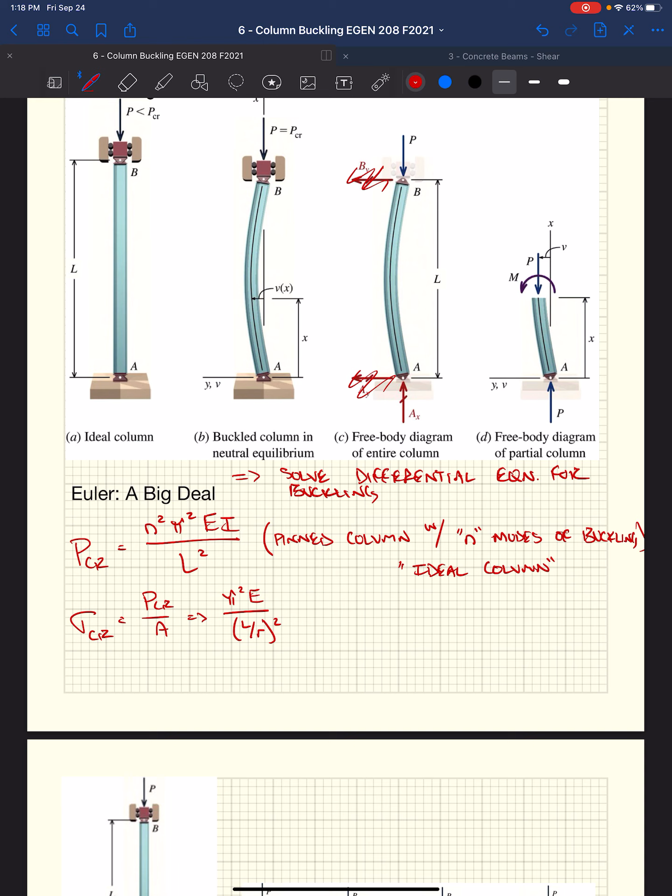Now we get onto the stuff that you guys are paying for, which is learning about columns, okay, whether or not you want to pay for it.

So we started talking about columns on Wednesday, right? These long, slender members that are induced with a compressive load, okay? We talked about Euler, Leonhard Euler I think is his name, who was super bored and decided to solve the differential equation for buckling and figure out what is the critical load, based on material properties, right, modulus of elasticity E, the moment of inertia, so that is the stiffness or resistance of a cross section to accelerate rotationally.

Okay, you guys got some of that in statics, I believe. And then the length of that column between its fixity points, you can figure out what is the load at which it buckles, like you would a ruler between your hands. And then if we just substitute in the fact that stress is force over an area, we can figure out this critical stress that is induced in this member when it buckles. Based on that, the equation simplifies to pi squared E over L over R squared, R being the radius of gyration, which we'll talk about.

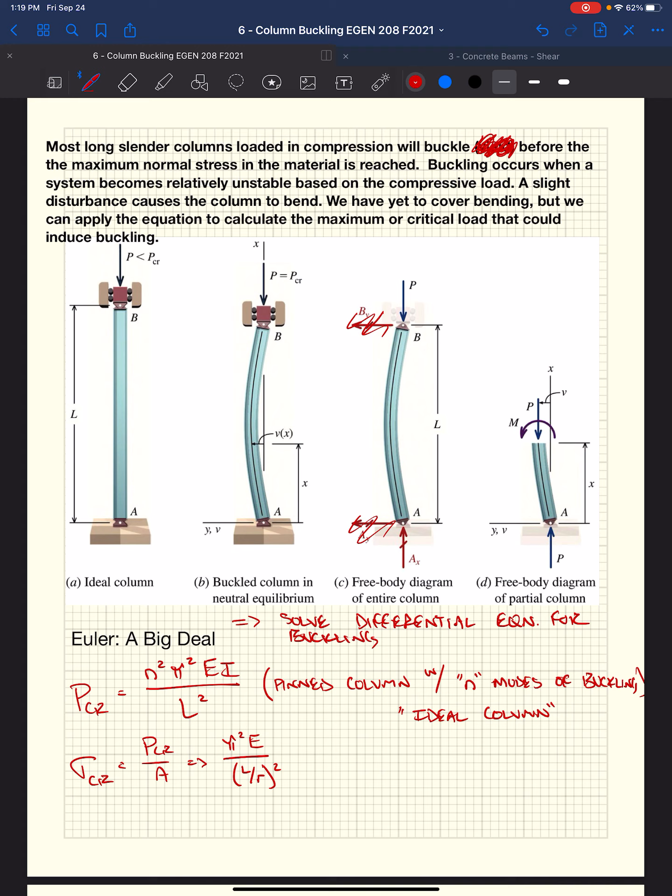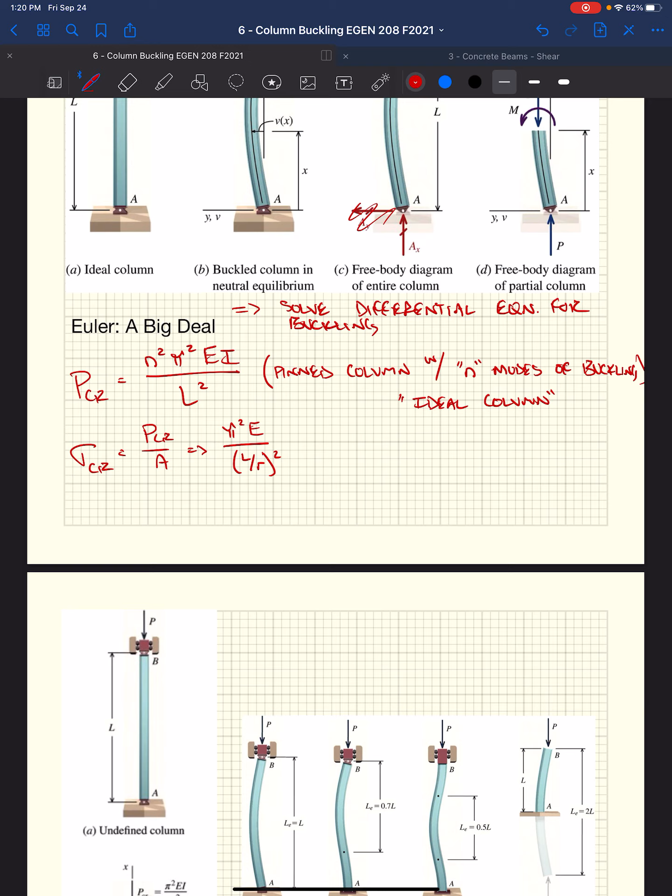And this solution is for a pinned column like we see here, with n modes of buckling, as I mentioned. As you can see here, we have our first mode of buckling, which would be one buckled shape. Then you have the second mode, which is a potential, right? And as you can see from the solution, it has n squared in the numerator. As our number of modes goes up, that critical buckling load goes up as well.

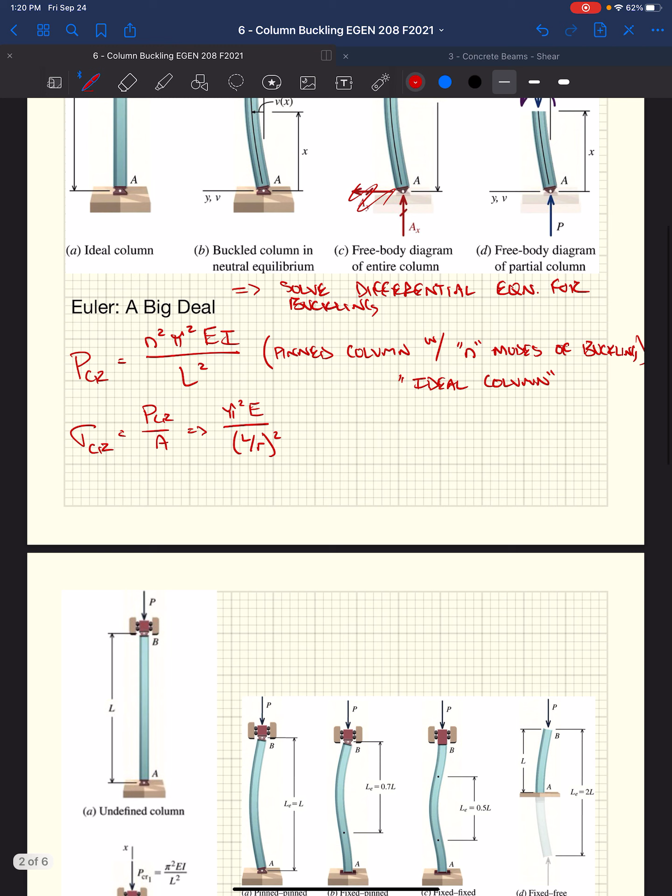All right, so some things to think about. If we graphed L, or L over R, and P critical, or our critical stress, right? So L or L over R is essentially the brace length — how long is our column? And then we figured out, we plotted different points for a given cross section, with a given modulus of elasticity and a given moment of inertia. We would get a curve that looks something like this.

Okay, essentially we exponentially increase our ability to carry axial load as we decrease the length, right? You can think of that like this big piece of rebar — me squishing on it right here in front of you, it's going to be able to carry a lot of load. But as we continue to make this rebar longer and we still put axial load in it, as we get longer and longer, that load drops off quicker, really fast right at first, and then it starts tapering off, okay?

So if we looked at some of this behavior, we could say our P critical, or our critical stress, is inversely related to length. So the longer the column is, the lower our ability to carry load. I think that makes sense.

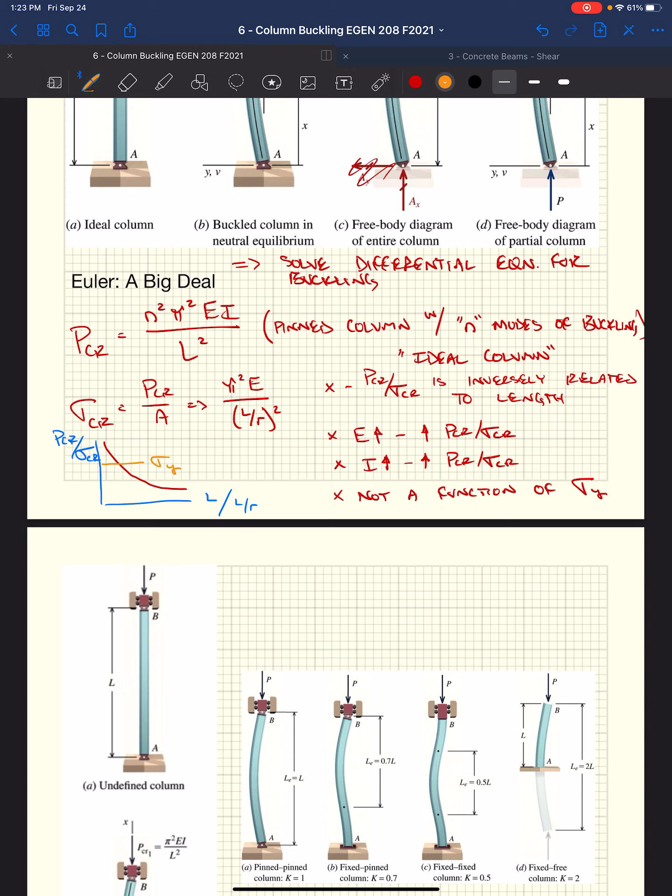Nowhere in this equation do we see the yield stress, right, or the strength of our material. So it's not a function of the strength of our material, but it is a function of our stiffness, okay, our modulus of elasticity. And as you can see in this graph, as we get lower and lower, we'll eventually get to a point where it actually won't buckle, but we will truncate it at our material strength, right? So at some point, we're going to have more strength because it's not going to buckle, but in reality we're going to yield. We're going to hit some sort of material plateau in our column.

Well, not all columns are pin-pin, okay? That's a pretty ideal column, right? Sometimes we can have a fixed pin column, right? Maybe you decide to embed a wide flange, right? This would be a wide flange section, an I-beam, okay? Maybe you embed this into the ground.

The lateral system at Langford, I think it's Langford, there's like a little dining common area as you first walk into that dorm area, okay? That whole building is carried laterally by big wide flange sections that are buried in concrete piers in the ground. They're just cantilevered out of there, okay? So the loads that are induced on those columns would follow this kind of fixed pin methodology, right? It's fixed at the base, it's not allowed to rotate, okay, or translate.

And then at the top where we have all of our roof framing in, it'd be more like a pin, okay? And then in some cases we might have a fixed column. It might have enough rotational restraint at the top where it doesn't want to let the column rotate. And then finally we have a fixed free column. So that would be one where it's allowed to translate and rotate at the top. Essentially a cantilever, okay?

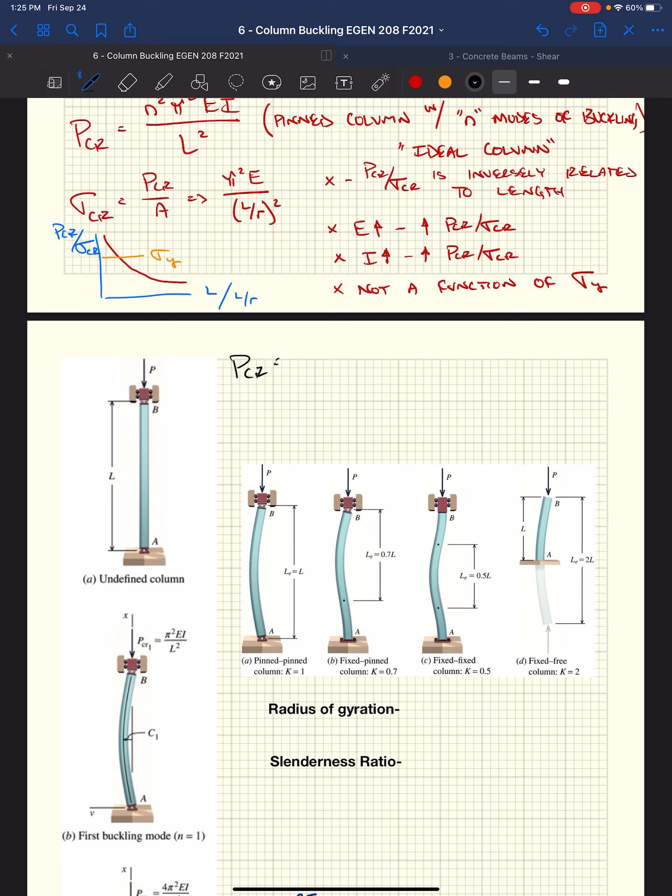So we got a new solution for this, right? This P critical that we had before, this is for our idealized column. Well, Euler went back through and calculated what the capacity is based on these different fixities, and he developed this equation. So now our critical force, or our critical load, P, okay, is pi squared EI over this term KL squared. Well, this KL is what we call L sub E, or our effective length.

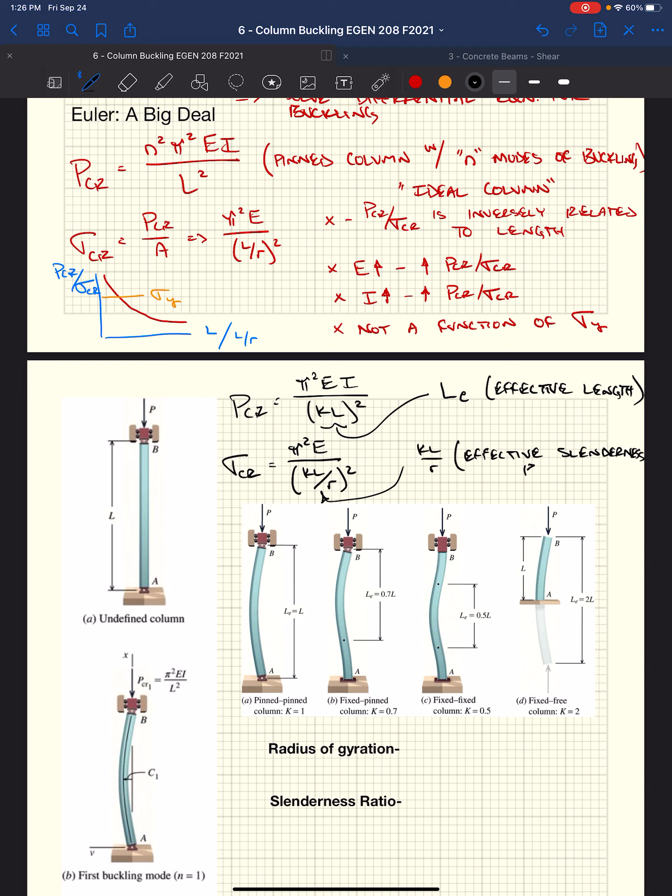And if we go back through and we divide by area, we end up getting this equation, pi squared E over that effective length, KL over R squared. And this KL over R is called the effective slenderness ratio, kind of, sort of. Okay.

So built into this equation, we essentially need to figure out what is our effective length. So our column's going to have length. Yes, Brett? In the first equation, is the L in the denominator supposed to have subscript E? No, this entire KL equals this effective length, L sub E, okay? And we get L sub E with this factor K.

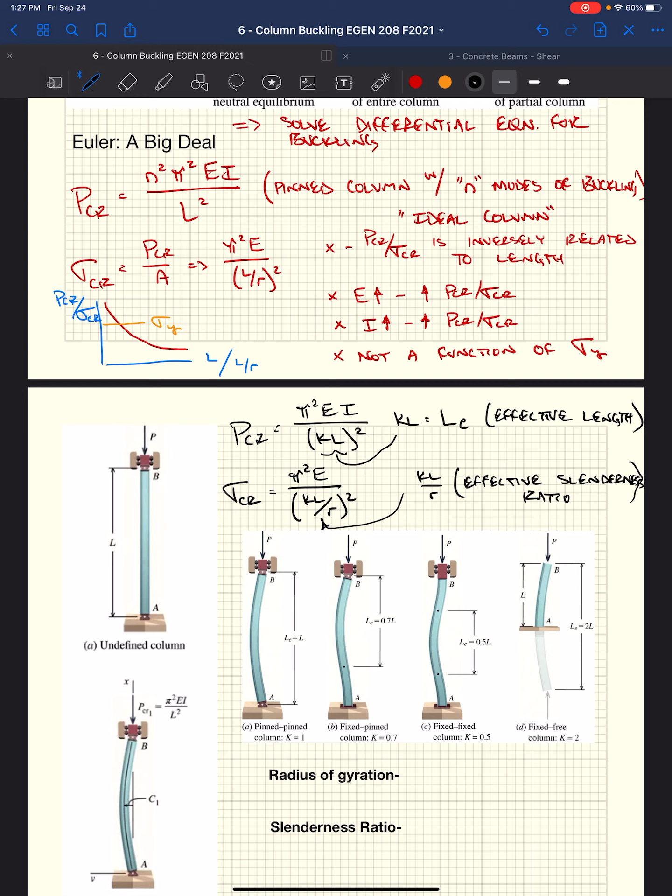And if you look at this image here, it gives you different K factors for different fixities of our column, okay? So when you get to our pin-pin model, which this is calibrated for, this is what Euler solved this for, our K factor is 1, so the length is L. I won't get into as much of the details, but it's based all off of a sine wave, so you can imagine this. This is one big sine wave that's running through our column. This is 0.7 a sine wave, this is half a sine wave, this is 2 times a sine wave for a cantilever.

Well, if you add some fixity, you reduce that factor, right? Now it's 0.7. You add some rigidity, add some stiffness, you're restraining the column from buckling out. If you do that, your effective length goes down. Well, if your length goes down, then your strength goes up, right? Same with fixed case. We're gonna say half the length is your effective length, because you have stiffness that's keeping our column from buckling out, and so our capacity is going to go up even more.

A fixed free condition, or this cantilevered condition, the K is 2, so you essentially double the length of the column because you have less fixity, right? So I think all of those make sense. One of these terms in here is the radius of gyration, or R. That is simply the square root of I over A. Slenderness ratio, well, that's our effective length over R, which is KL over R.

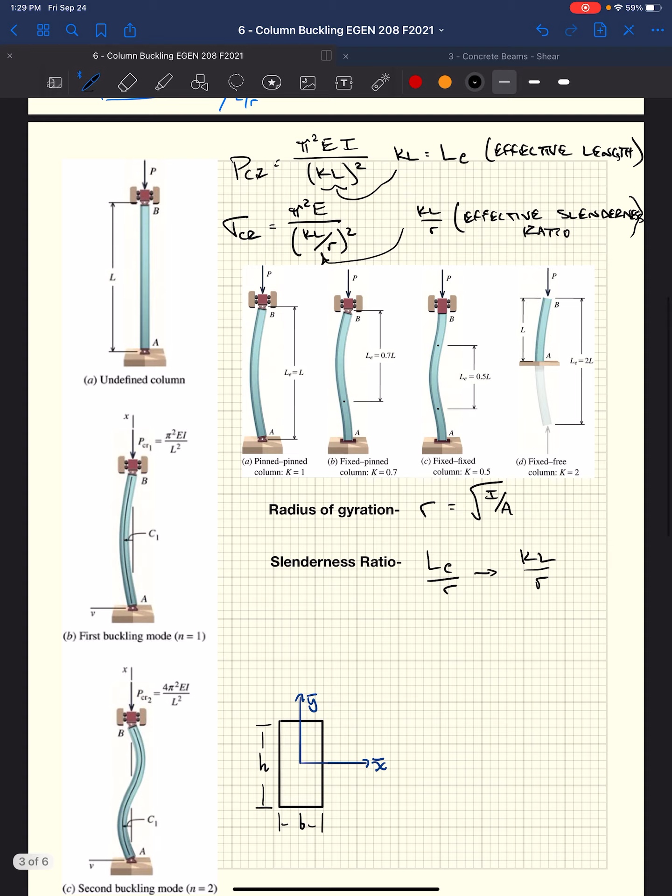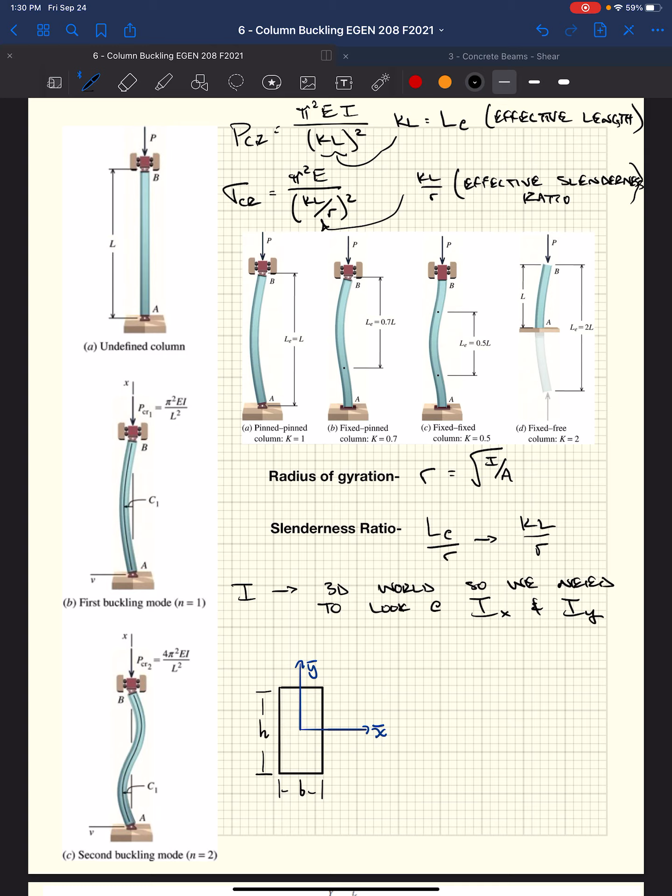One of the big items in this equation is our moment of inertia, right? I. Well, you guys remember calculating some of this, right? So I is our moment of inertia, and we live in a 3D world, right? So we need to look at, right, you did some of this in statics, right? Moment of inertias. Remember this?

Okay. So if we looked at this rectangular cross section, and we put a coordinate system, same with this I shape, a coordinate system of y and x, our moment of inertia about the y is the resistance for this section to twist about that axis, right? And then with the x direction, it's the resistance to twist in this direction.

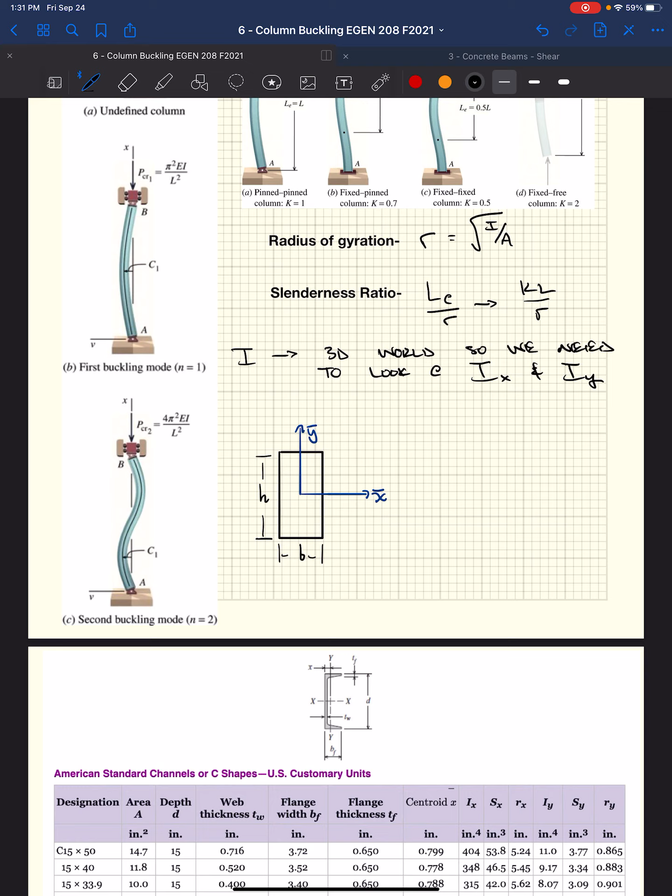And so we effectively, for this column, for instance, we have the ability to buckle in both directions, right? It could buckle in and out of the page, and it could buckle in the plane of the page, right? And there's the possibility that we might have different fixities in those two directions, right? Could have different effective lengths. Maybe it's braced this way at mid-height, but then not in this direction, right? So we need to go through that, and we'll analyze both those cases. And to do that, we need the moment of inertia in both directions.

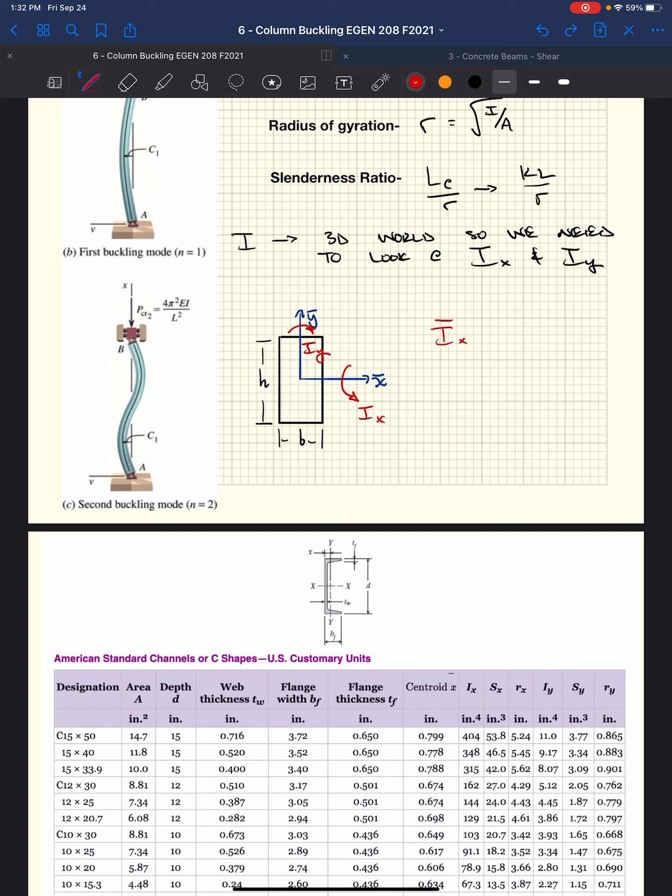All right, so we've got IX, we've got IY. For a rectangle, if you remember, IX is BH cubed over 12. IY is HB cubed over 12. And if H is greater than B, then IX is greater than IY.

So you need to be pretty comfortable about calculating this, right? Rectangle is pretty simple. Well, an I shape is essentially a series of rectangles. If you remember in statics, I assume you did the parallel axis theorem, right? Essentially coming up with the moment of inertia about the centroid of a section, okay? It's essentially the moment of inertia of all of these three rectangles, summed and transformed into our centroidal axis, right?

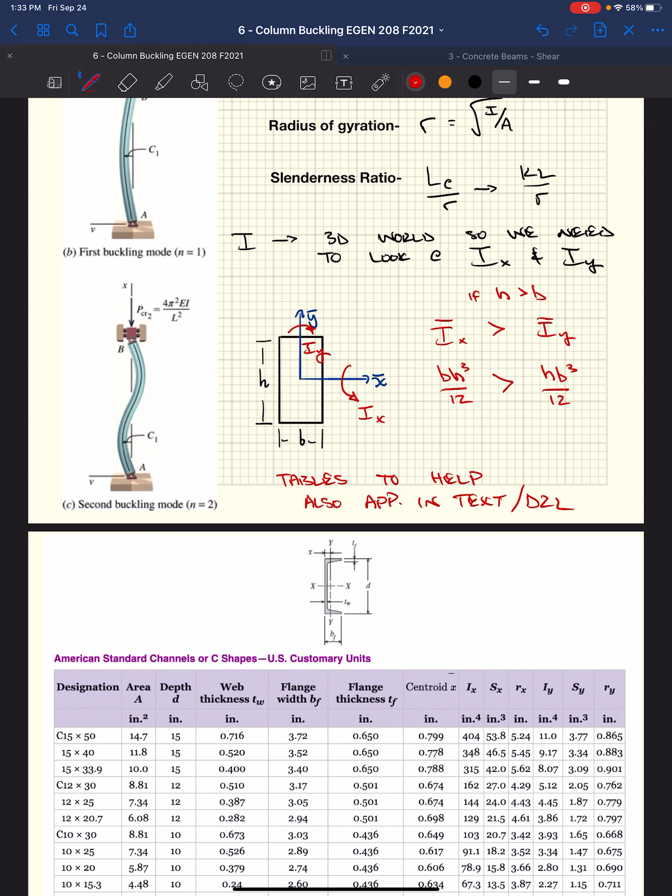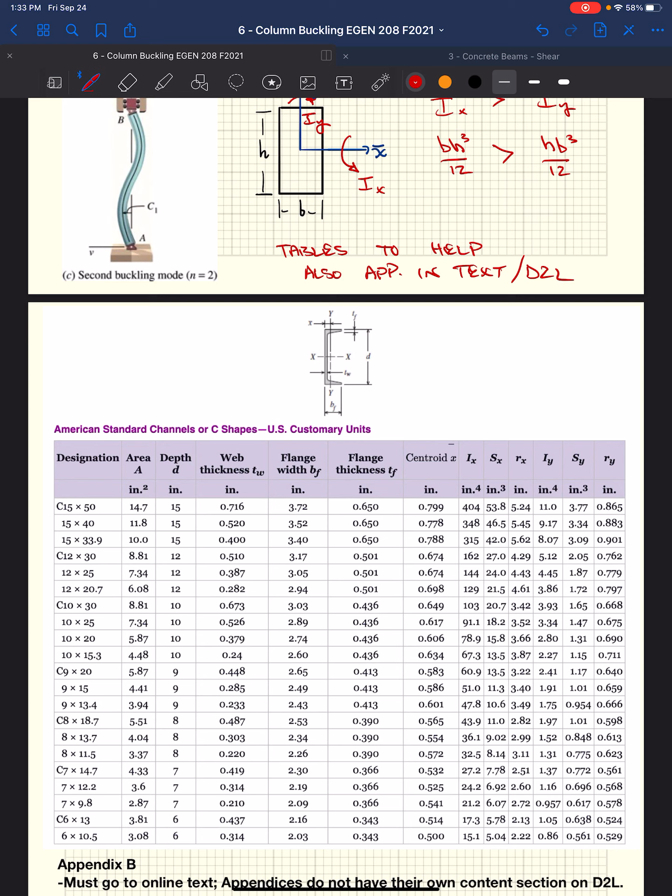Well, as engineers, we don't like to do things that we don't have to, okay? Sometimes you're gonna have to calculate the moment of inertia, but a lot of times, all this stuff is out there for you, right? Somebody has already done it for us, we don't have to do it twice. So we do have these tables, okay? This is in Appendix B in the text. So you gotta actually go to the Wiley resources, go to the e-text, go to the chapters, and at the very bottom it'll say appendices, and you can find these tables, okay? And you'll need them for the homework for next week.

But in these tables, okay, for instance, this is a standard channel, okay? So a C shape in steel. Some of you probably are unfamiliar with this, but in steel they have designators, okay? This is what they would call a wide flange, so it would start with a W. But the designation is the same. So a C12 is a nominal depth of 12 inches, okay? Times 30, well that's the weight of this section per foot.

So this is probably an 8. So this is like a W8 by 13. 13 pounds a foot. Nominal depth is 8 inches. It's really probably 8.15 or whatever, but they classify it as nominal depths. And then you'll see them in these tabled values. So if you see it in a homework problem, it says W12 by 35, right? You know that this column is 12 inches deep and it weighs 35 pounds per foot.

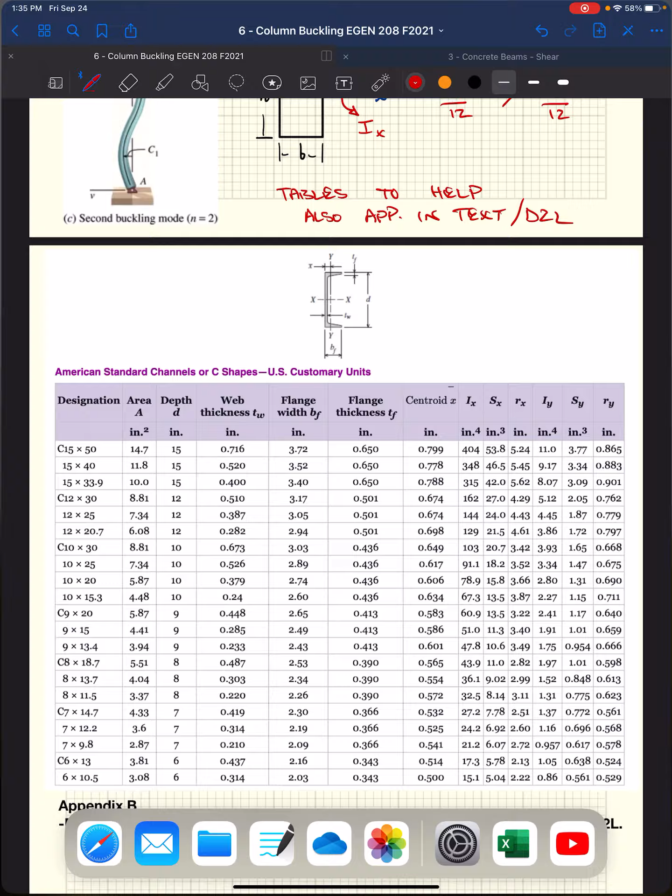They can get ridiculously large. I've seen W14 by like 4 something, okay, for like big high-rise columns. Flanges are like multiple inches thick. So pretty impressive stuff, and they roll these out in the steel mills. So we have these channels.

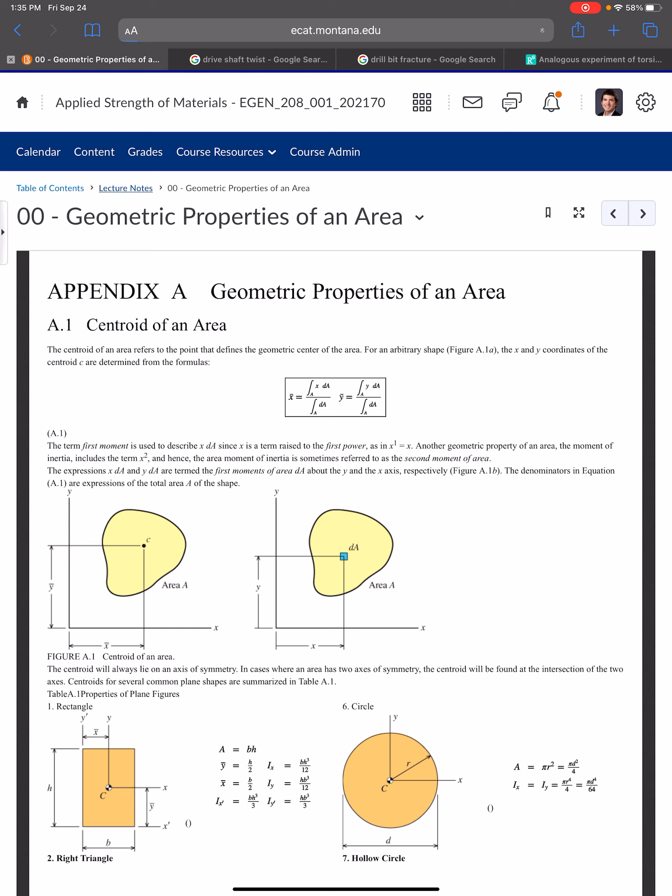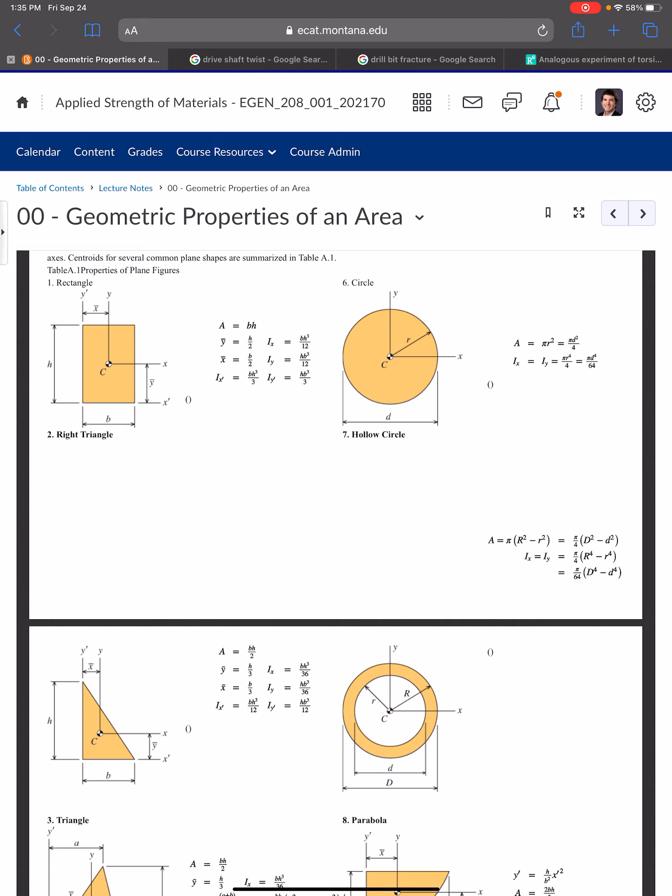The other thing, if we don't have a designated shape, I actually took Appendix A out of the text, and I put it into our lecture notes section for the class. So geometric properties of an area gives you a little review of what the moment of inertia is, but then it gives you a lot of these stock equations, right, expressions for the moment of inertia about each of these sections. Any questions there? So as I mentioned, this is nominal depth. This is weight per foot.

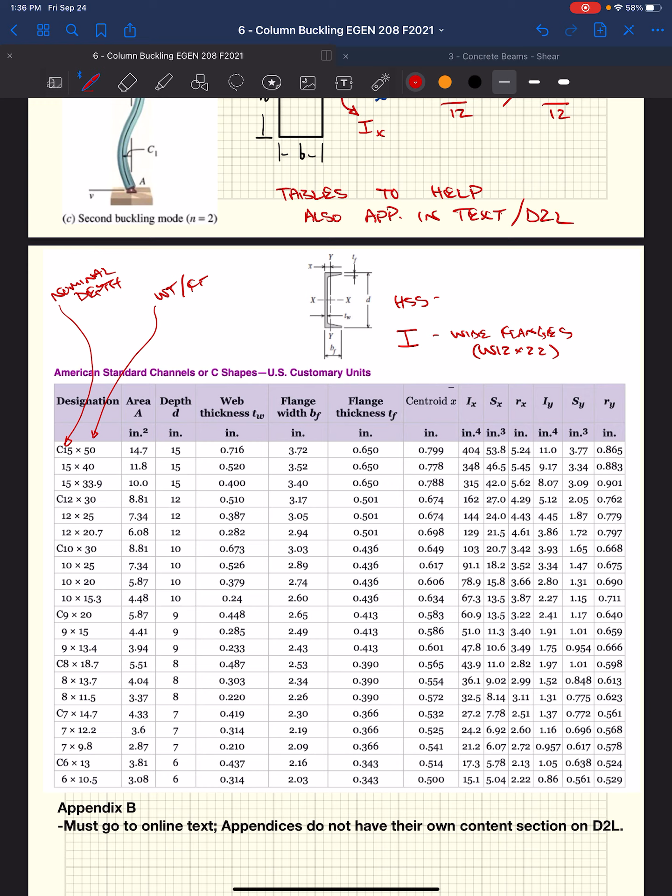We also have I shapes, which are called wide flanges. So this would be, say, a W12 by 22 is a good shape. We have HSS sections, right? HSS stands for hollow structural sections. There's rectangular ones, there's square ones, and there's round ones, and they're not pipe. They're different, okay? Pipe comes in schedule sizes. HSS comes in diameter and weight. There's also angles, right? 4 by 4 by half, something like that. Obviously leg lengths, and then the thickness of each leg.

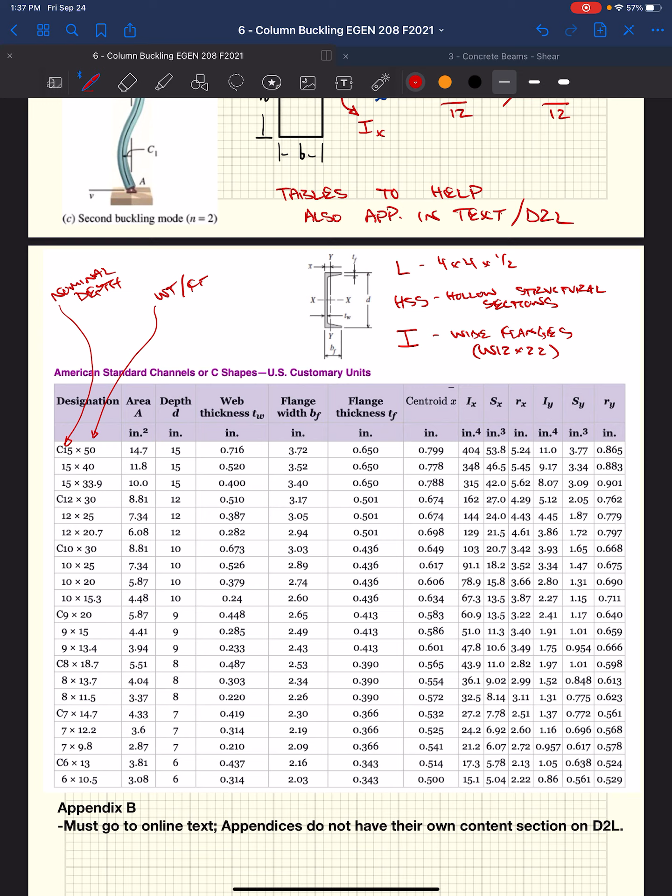All right, we're going to do a column example. So we have 2 channels. They're both C12 by 25, so 12 inches tall, 25 pounds per foot. And they're used for a column that is 35 feet long. I mean, that's like super tall, okay? Assume pin connection at each end of the column. We can use the modulus of elasticity for steel, which is 29,000 KSI. It's always that.

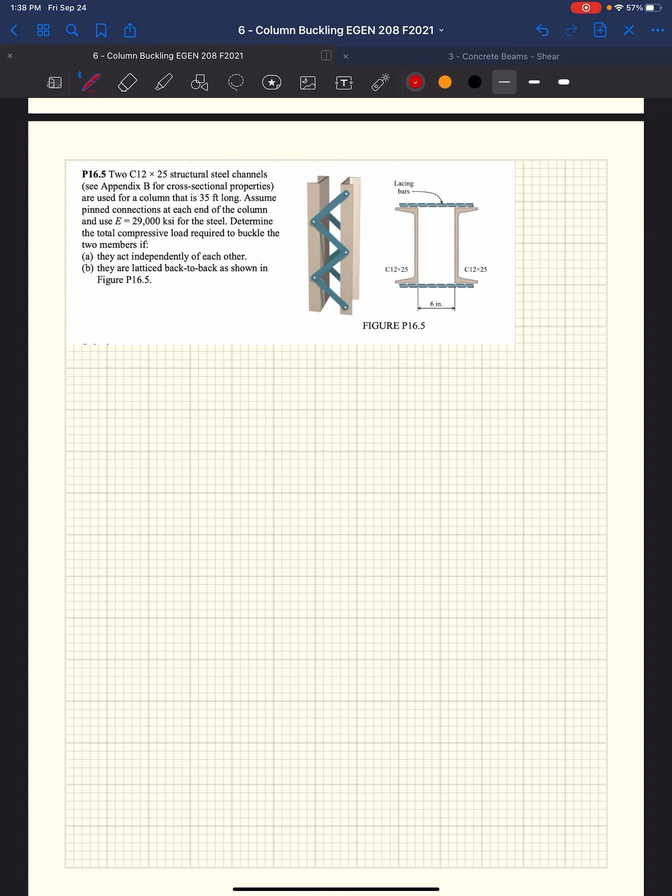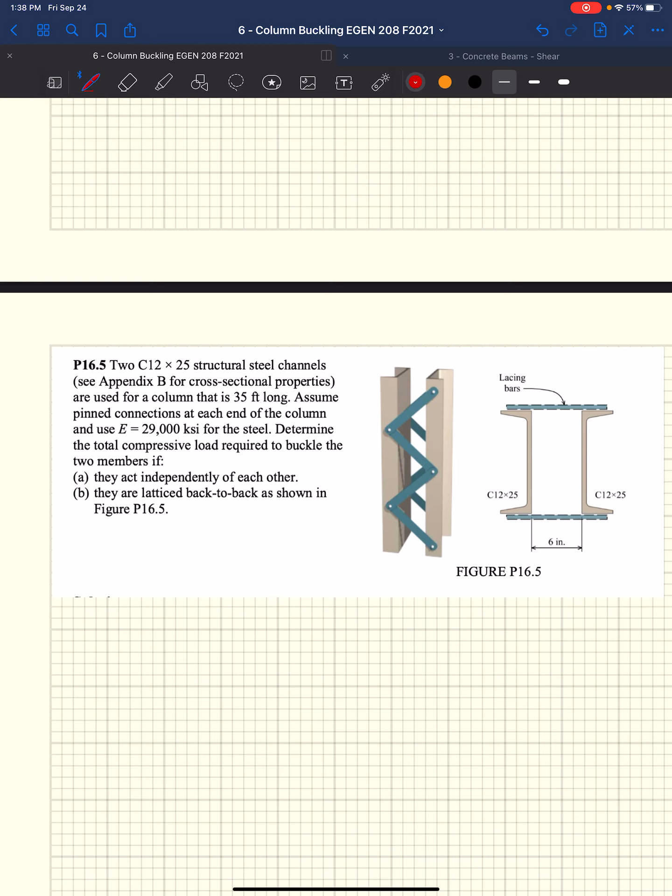And they ask us to determine the total compressive load required to buckle the two members if they act independently of each other, or if that blue lattice work that's shown there is in place and sufficient to make this one section. Okay, latticed back to back as shown. Well, as we know from up above, we have our P critical equations, right?

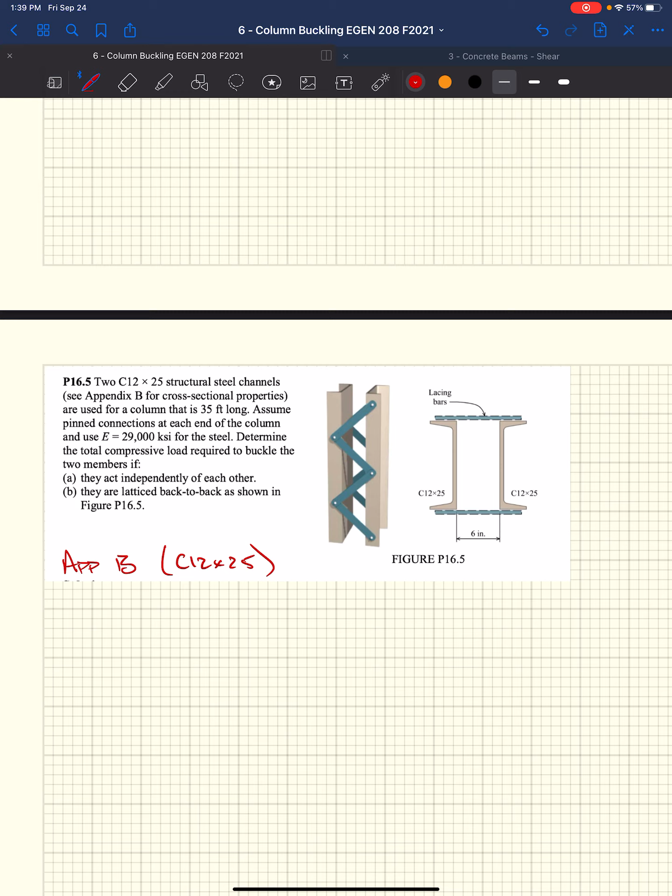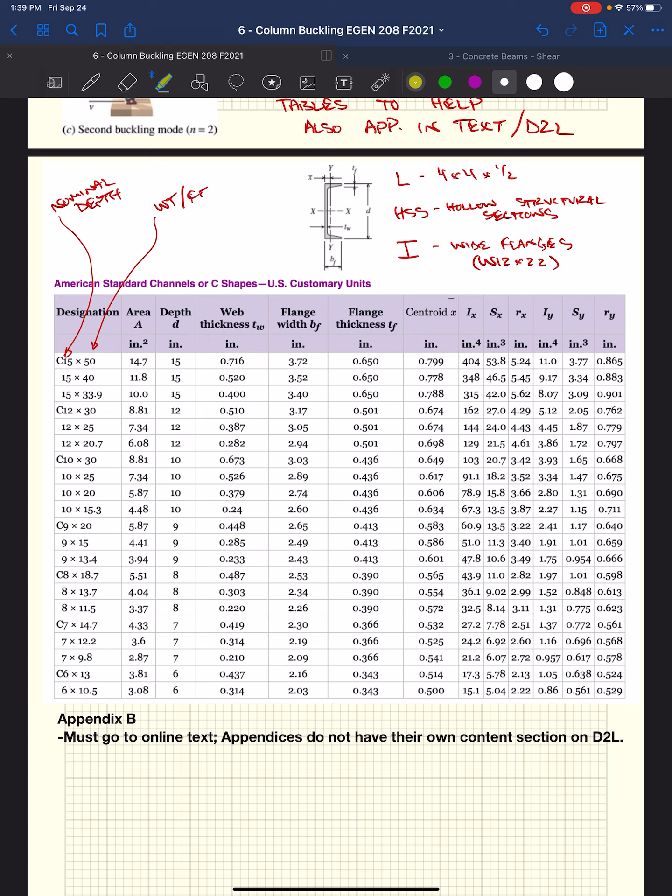Our P critical equations need the moment of inertia, right? Area, that goes into the radius of gyration, right? So I'm going to go out to Appendix B for a C12 by 25. And I'm going to grab the area, right? C12 by 25. So if we go up here, that's this row right there. So I've got it here. So I'm going to write down the area. The area is 7.34 inches squared.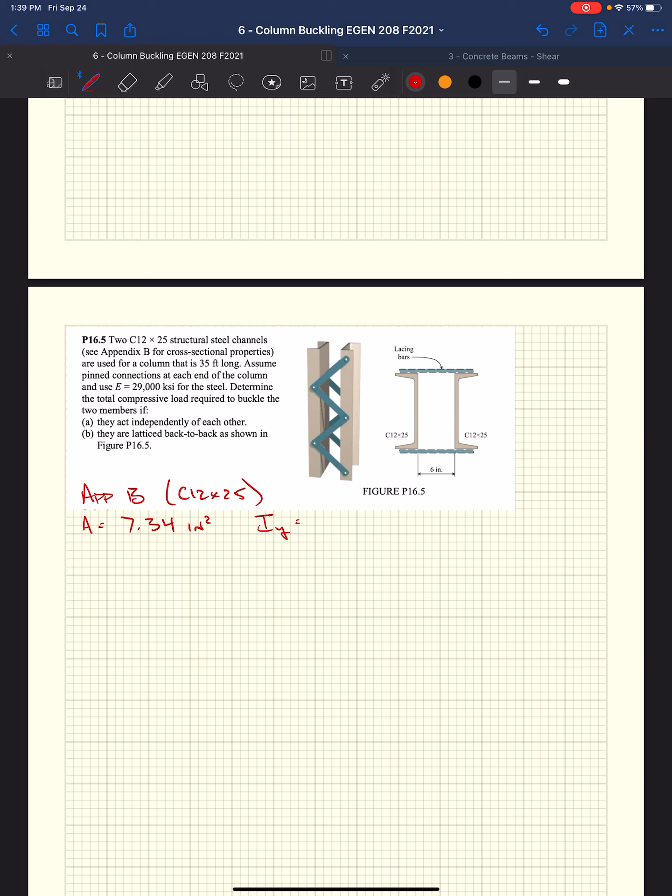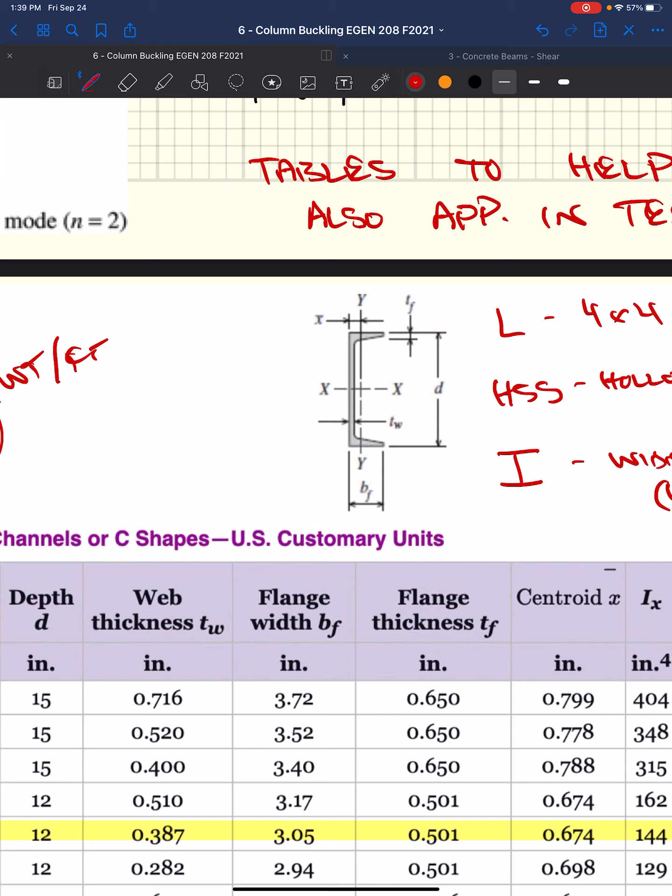Moment of inertia about my y-axis. Well, we got to be careful when we look at our y-axis, make sure the orientation is right. In each of these tables, they give a little diagram depicting what axes they assumed for the local coordinates of this channel, right? So we've got x running horizontally, which is typical. So I'm going to just write that up here so that I remember. We have x and we have y. Right? So I sub y, from our table, is 4.45 inches to the fourth.

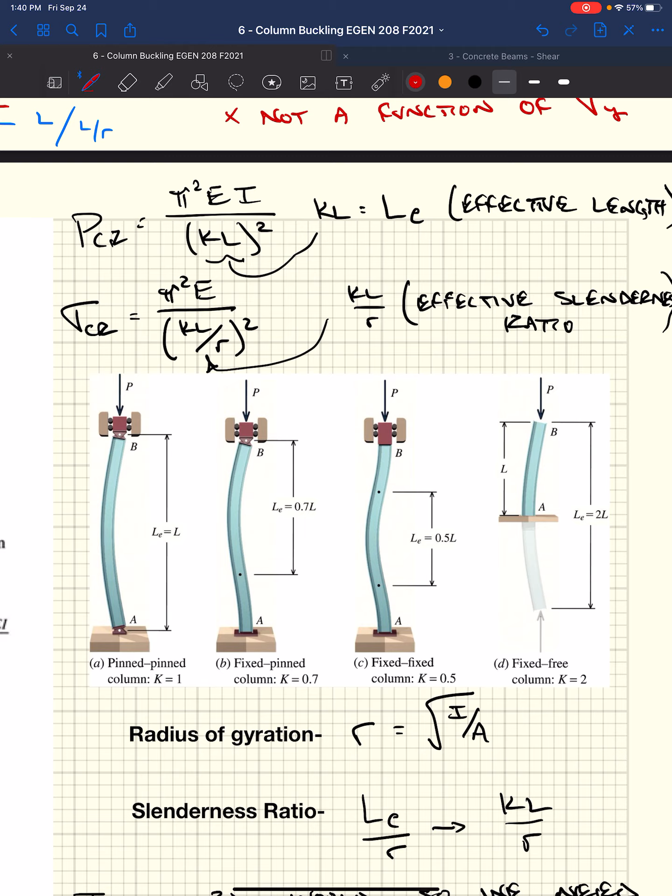We know the length of our column is 35 feet. We know we're going to need to come up with some effective length, right? Effective length is K times L. They told us it was pin-pinned. So if we go back up here to our different fixity types at the end, if we go to pin-pin, well, that's our standard case. So our K value is 1.0.

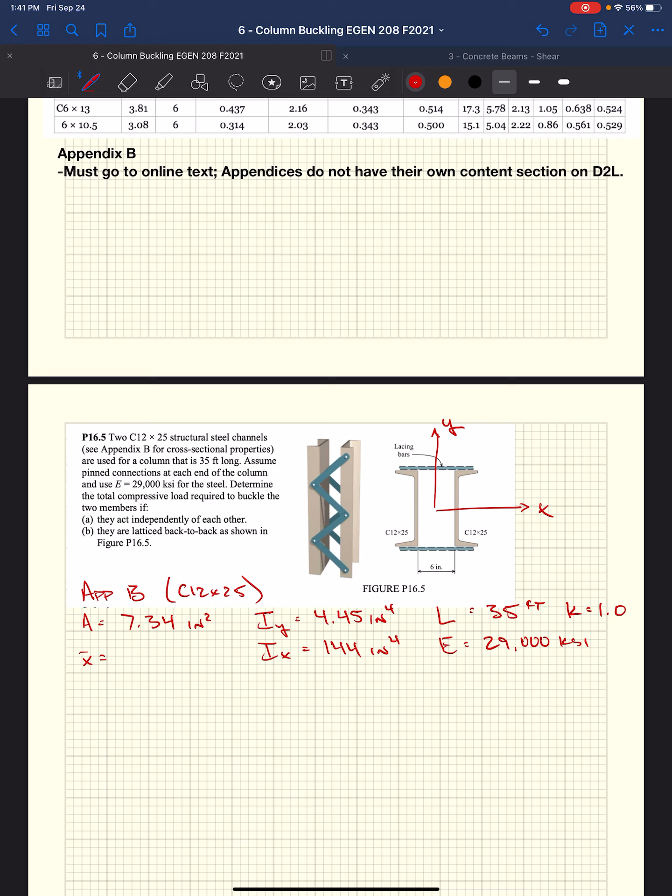I also really want to know what IX is. It's 144 inches to the fourth. A lot stiffer, right? You can already see here which way it's more easily going to buckle about. We have our modulus of elasticity. Well, that's 29,000 KSI. And I'm going to grab one more parameter because it's going to help me as we continue down. And that's this X bar.

Well, if we think ahead here, if they act independently of one another, the centroid of our cross-section is the centroid of each of our individual channels, right? So our moment of inertias provided in the table are correct. Well, if we combine these two together, in the rotation about the y-axis, now you have these two channels acting together. So now we have a composite member made up of multiple elements, and the fact that it's composite is going to change its moment of inertia. And so we're going to have to use the parallel axis theorem.

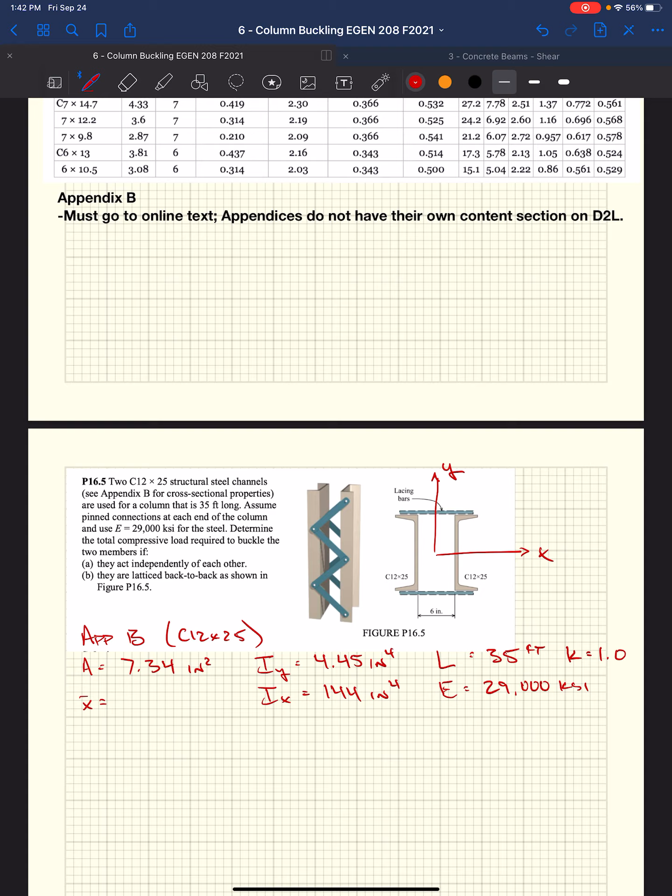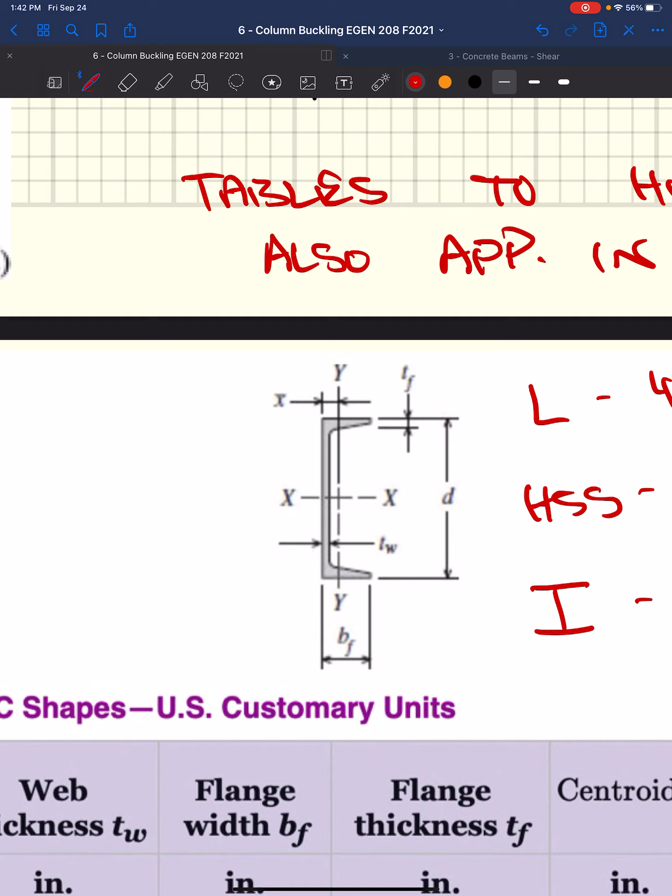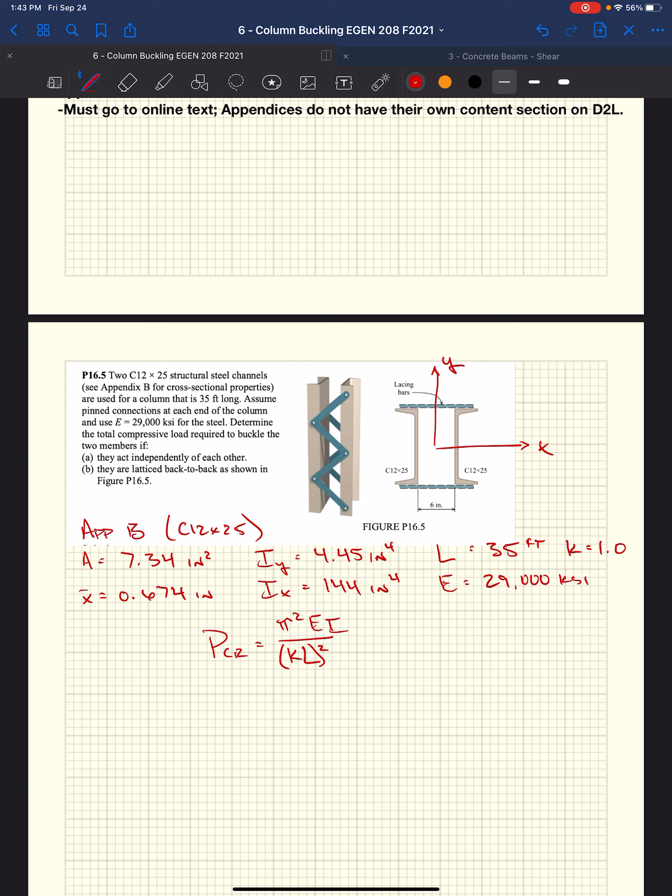And in order to do that, I need to know exactly where the centroid is of this channel. So I want to know what my X bar is. So in this table here, they give us this X bar, right? The distance from the back of the channel to our centroid is X bar. So I'm going to write down X bar is 0.674 inches. Our base equation, right, is this KL squared.

So knowing this, now we can start tackling our two problems, right? One was if the channels act independently of each other. So in this case, we would look at each channel by themselves, and because the channels are both the exact same, we're going to just double our answer. So our P critical total equals our P critical of our channel times 2, right?

If the channels were different, would you add them together? Yes. Yes. You're making a lot of assumptions, but I think for this class, for simplicity, we would just add them together. You'd have to assume that they would share loads equally. So we have our critical force for our channel. We've got two channels, so we add those together to get total. Well, we have two axes. Whoops, that is not how you spell axes. Right, X and Y.

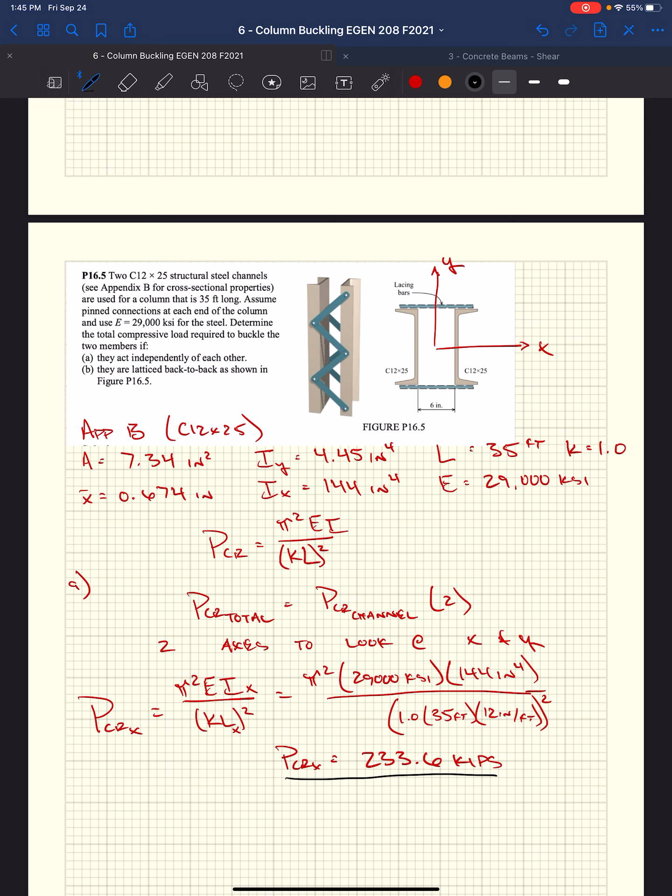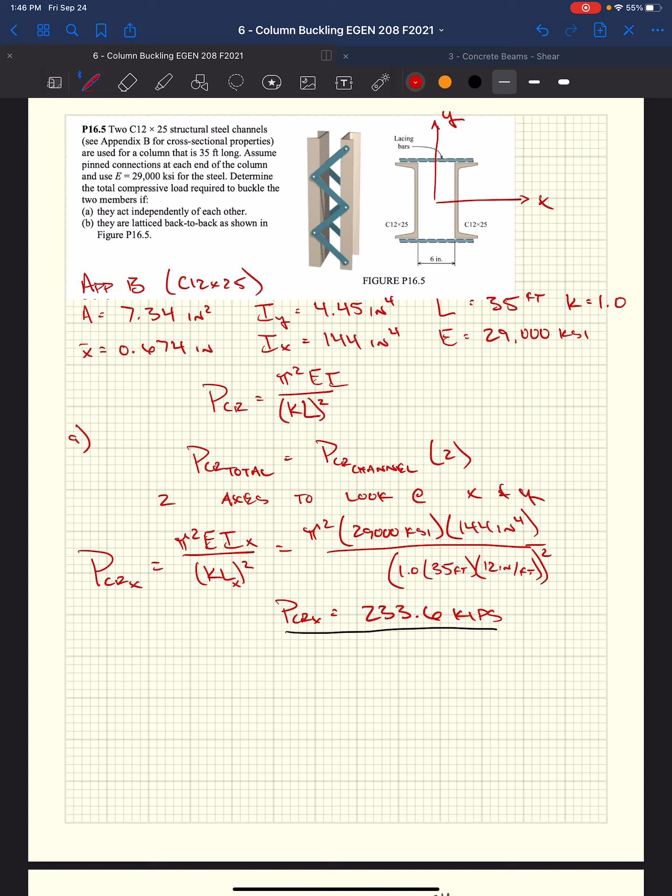And when I denote KL, our effective length in the x direction, the reason why I denote it with x is that there's a possibility that your column might be supported differently in the two directions, right? So for rotation about our x-axis, if I had a support on the y-axis that was maybe half the height up, so 17 and a half feet, that would reduce this length, right? Same with the other direction. But it said it's pinned in both directions.

So we're going to now look at P critical in the y direction. Now we got moment of inertia in the y direction, effective length in the y direction. We now get pi squared, 29,000. Our moment of inertia in the y is very, very small.

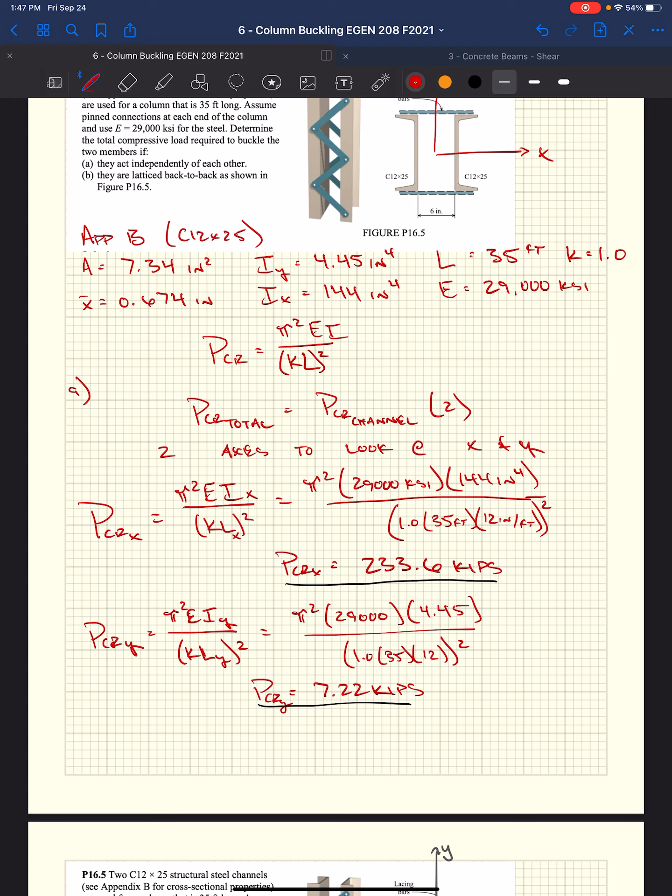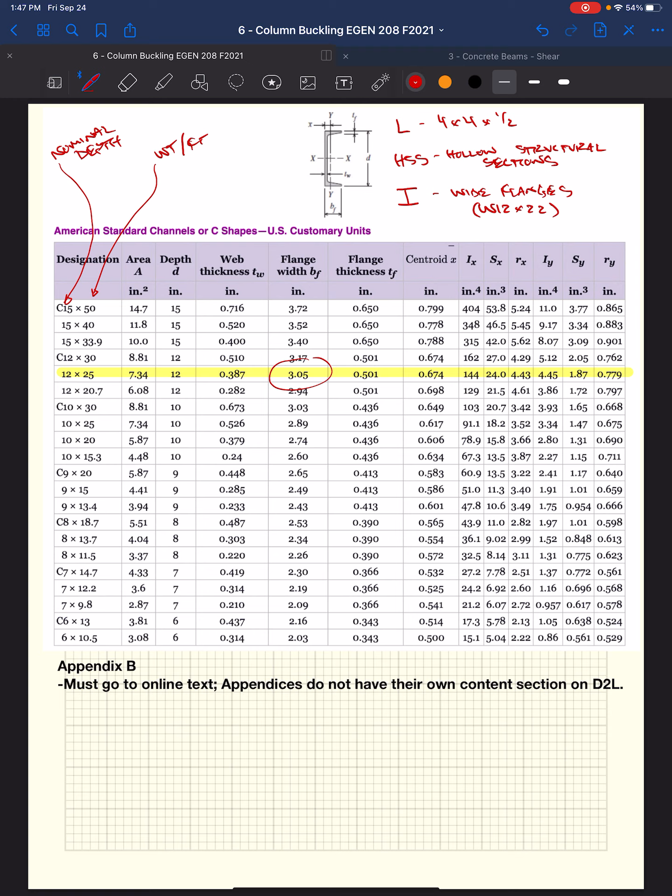We get a measly 7,000 pounds, just over 7,000 pounds. Huge difference, right? But as you can imagine, if you're looking at this actual C12x25, right, the flange width is only 3 inches wide, where the depth of the member is 12, right? It's like a 2x6 or a 2x8, right? It's going to want to buckle, or you don't want to lay that flatwise, right? It's not as strong as it is standing straight up. Same goes for columns.

So in this case, the weak axis controls with them acting independently. So our total axial critical load is 2 times 7.22 or 14.4 kips. So that's the answer to A. We had these two 12-inch channels. They were 35 feet tall. They were pinned at the top. You could put 14,000 pounds on them.

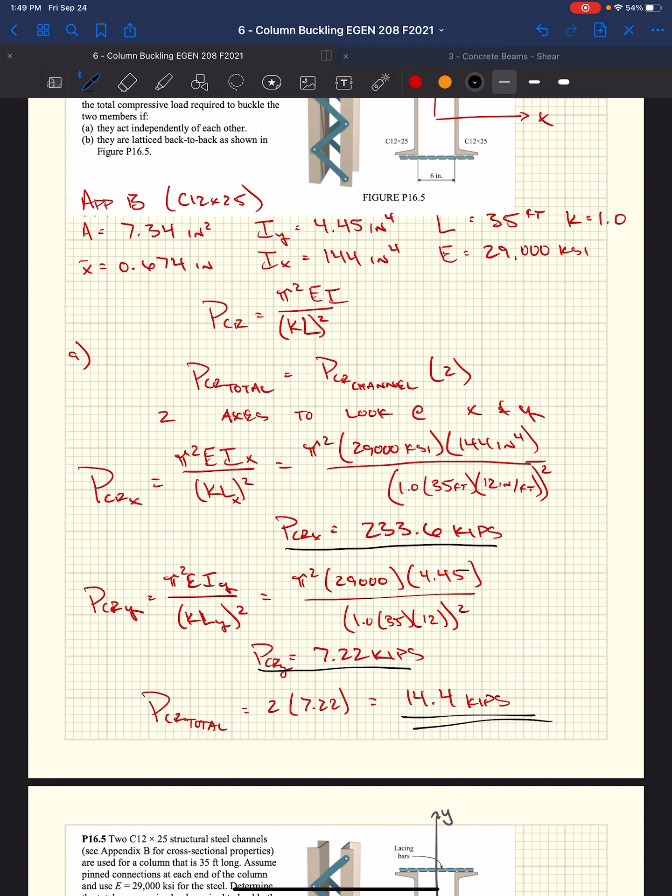I mean, that's kind of nuts, right? That's a lot of weight. I mean, that's like 2 3/4 ton pickups sitting on this pogo stick that's 35 feet tall. Right? Doesn't that seem ridiculous? That's pretty cool. Steel's nuts. Right? 35 feet tall. You look out the window and you'd see it just below us.

Anyway, you guys don't care. That's fine. I care. That's all that matters. At least that's what I tell myself.

Well, now we're going to take it a step further, and they said, well, we're going to connect the flanges of these channels. Okay? So not only are we going to be sitting these two channels down on the ground, right, pinning them at the top and bottom, but now we're going to connect them so that when these try to rotate about what was our weak axis, right, the y-axis, okay, they're going to bend as a group. Well, when they bend as a group, they no longer have a moment of inertia of themselves. They have a moment of inertia of the entire group, right? The assembly.

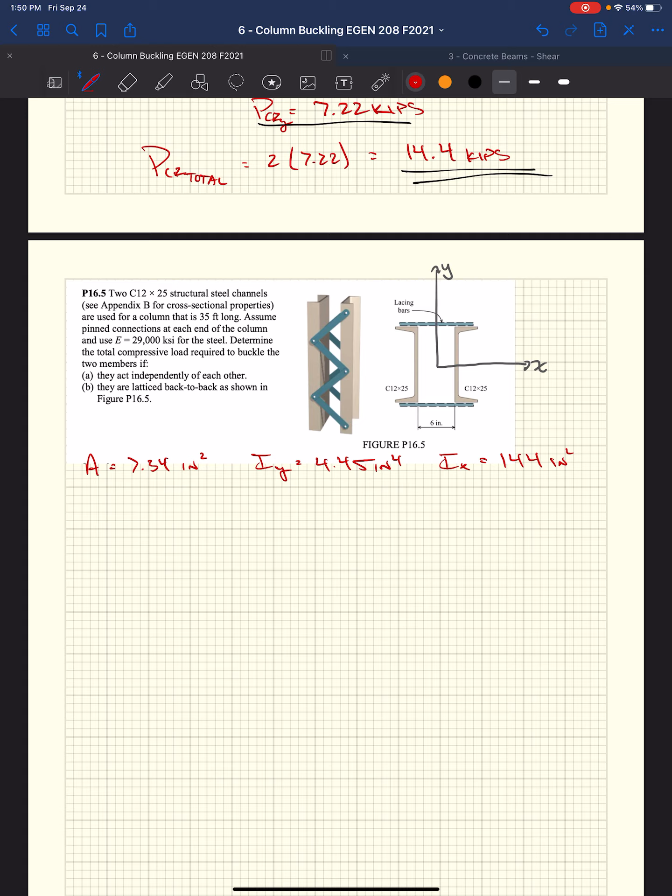So I'm going to go back through and, to make it easier, A equals 7.34 inches squared. IY equals 4.45 inches to the fourth. IX equals 144 inches to the fourth. This is that X bar that we talked about, which is going to be helpful here. E is 29,000. And L is 35 feet. K equals 1.

So for part B, as I mentioned, now we have a composite section. So we need to find the moment of inertia of that composite section. Right? And more specifically, we just need to find the moment of inertia in the y direction, right? Because connecting these two, they never gave us anything about what this lattice work is.

So when we look at rotation about the x-axis, right? Whether or not these two channels are connected with that lattice work, they could care less. They're just going to have the same moment of inertia about the x direction, right? Or they'll essentially have twice the moment of inertia, which is essentially what we did already. We doubled it. So we need to find IY of the composite section.

Well, here comes your parallel axis theorem, which you guys probably already jotted down, highlighted it, excited to use it. Right? We have this moment of inertia about any given point, right? Is the moment of inertia about a centroidal axis, right? Or about some point moved to your next point of interest, right? Where you're headed, which is the area of that section times the distance to that point squared, right?

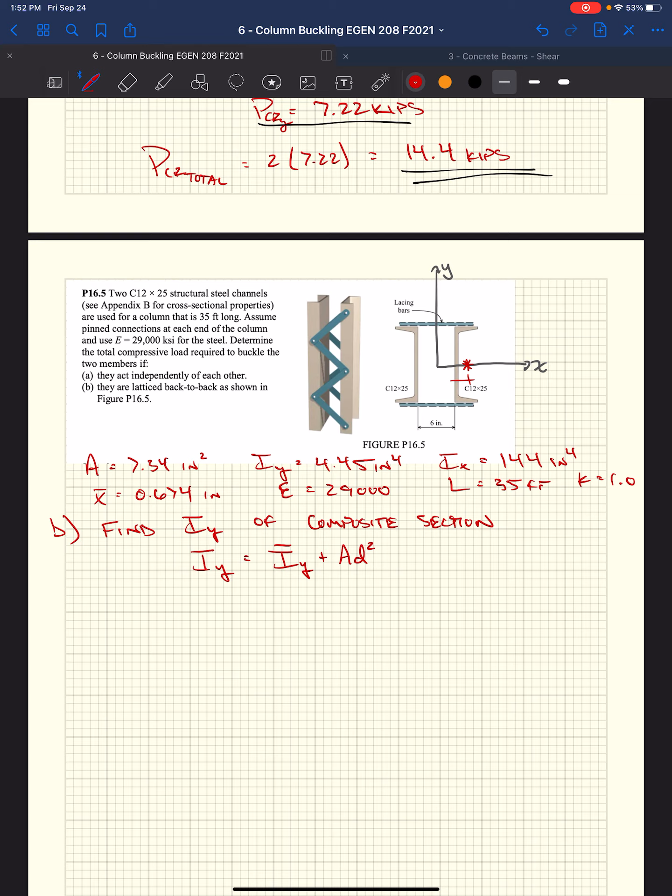So in this case, we've got X bar, right? This is the centroidal axis of each of these channels between the flanges, right? Remember, getting the centroid is the weighted average of the areas, right? You can figure out what this point is, but they gave it to us. So it's right here. Well, we really want to know what is the resistance to rotation or moment of inertia about this y-axis. So we need to know what this distance is.

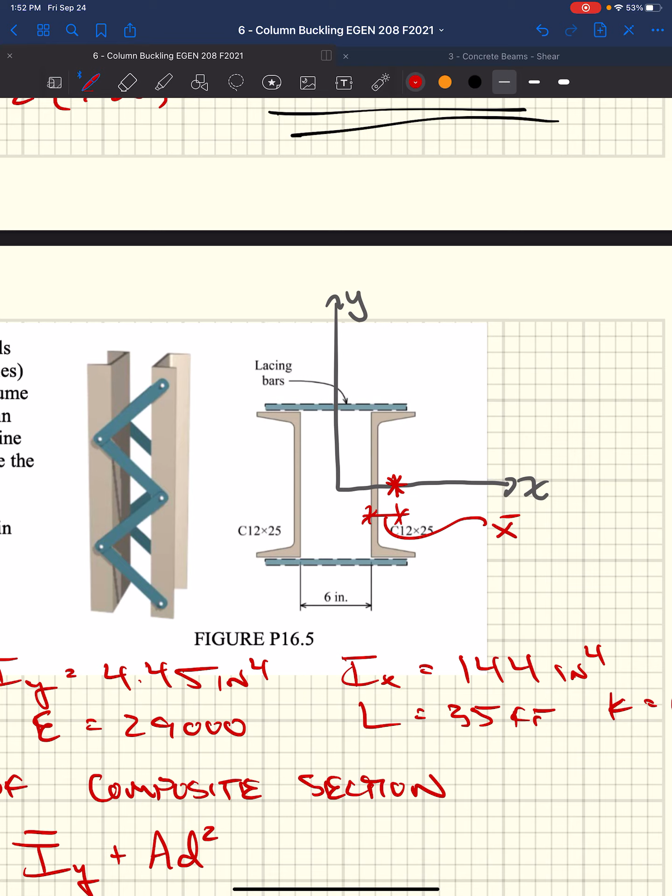Well, they gave us the 6 inches, which is the back-to-back distance, but we need to take it from the centroidal axis to that axis. So we need to take half of 6 inches plus that X bar. Right? So the distance between our coordinates of interest, where it was and where we want it about. So in this case, D equals 6 inches divided by 2 plus x bar, or 3.674 inches.

So if we look at this equation, now we have the moment of inertia I sub y equals 2 times. If we use our parallel axis theorem, we're going to do this twice. We're going to take the channel on the left and move it to the center on the right, and take the channel on the right and move it to the left to the center. So I'm going to do this twice, so I say 2 times.

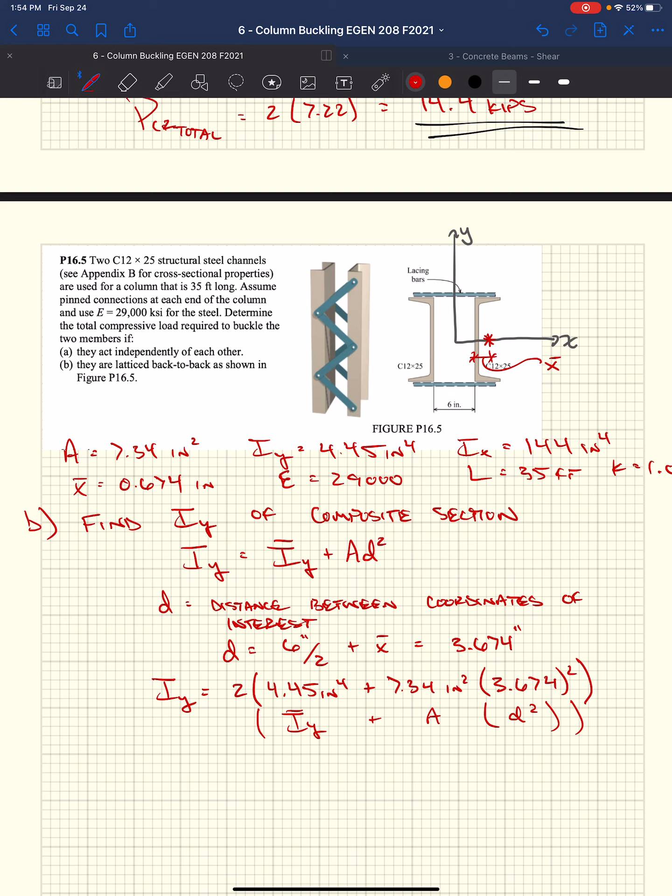Now I sub y bar is 4.45 inches to the fourth. Area is 7.34 inches squared. And that d we just calculated, that's the distance our axis is traveling. So this is I bar y plus A times d squared. That's what we're doing here, and we're doing it twice because there are 2 channels and we're moving them to the center. This only works doing it twice because the channels are the exact same channels. If they were different channels, this would be different.

So now we get a new I sub y of the whole section of 207 inches to the fourth. If we step back and look at Ix versus Iy, Ix equals 2 times 144 inches to the fourth. That was our Ix bar, 144. And looking at the coordinates, our new x coordinate with them connected together, our x-axis aligns with the x-axis of each of those channels.

So we don't get any growth of the composite section's moment of inertia. Whereas in the y-axis, we essentially had these independent channels rotating about their y-axis between the flanges, and now we're moving it to the center. When we did that, we got 207. So we get 288 though in the x direction, which is greater than 207 inches to the fourth. Well therefore, Iy still controls capacity.

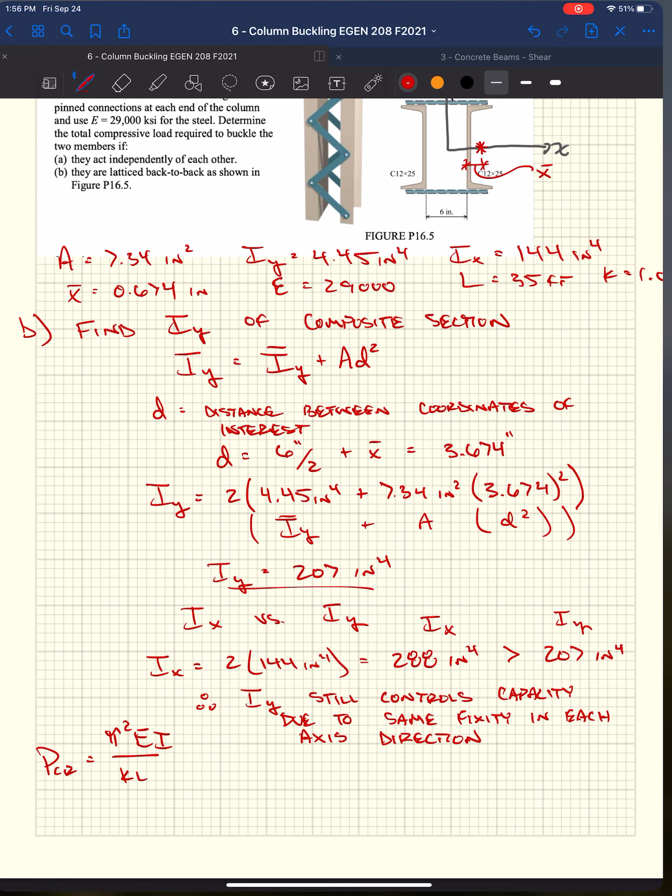Moment of inertia in the y is less, because in our P critical equation, everything - P critical equals pi squared EI over KL squared - because this effective length is the same in each of our directions, buckling about the x-axis, buckling about the y-axis. Because they're the same, and it's the same material, whichever moment of inertia is larger is going to give us our larger load. So the smaller the moment of inertia, in this case, the smaller the load. That's why I made this straight comparison between our moments of inertia in our 2 directions. And because I sub y is still less than I sub x, then that means I sub y is going to control.

Things would get a little bit different though if the effective length was different in those 2 directions. If we said we had a brace point on the weak direction at 17.5 feet up, maybe mid-height, you could cut that brace length in half. You couldn't make this comparison as easily.

But if we go through and calculate this based on 29,000 and 207, again we have 1.0 as our K factor, we have 35 feet, we're going to multiply by 12 to get inches. We get 335.9 kips.

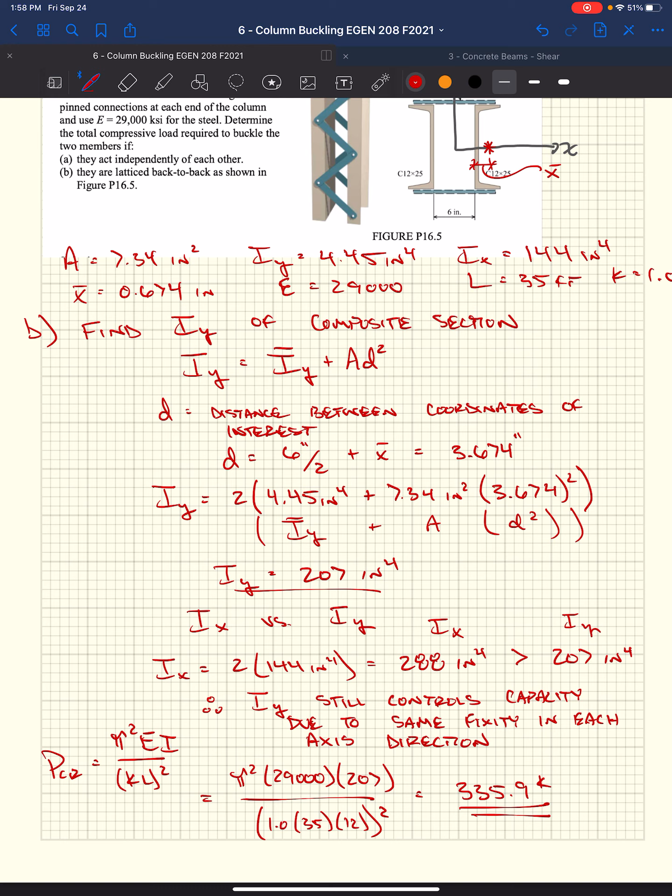Isn't that insane? That's insane. Say this thing was 12-inch - I wish I had a damn channel. You have two 12-inch channels, they're 35 feet tall, and you connect them 6 inches apart, they can carry 300,000 pounds, and they're 35 feet tall. Does that seem nuts? It's nuts. It's like 4 fully loaded tractor trailers, like 80,000 pounds a piece running down the road. You could stack 4 of them on this spindly ass column of steel and it would be okay. 335.9 kips. There's a lot of other specifics in there that aren't the case - we're smoothing things over a little bit in this class, but for the most part, I mean, holy shit.

Okay, look at that, perfect time. We're going to start torsion, which I had a hard time finding some cool videos for, so maybe I'll take the weekend and try and find some more cool videos.